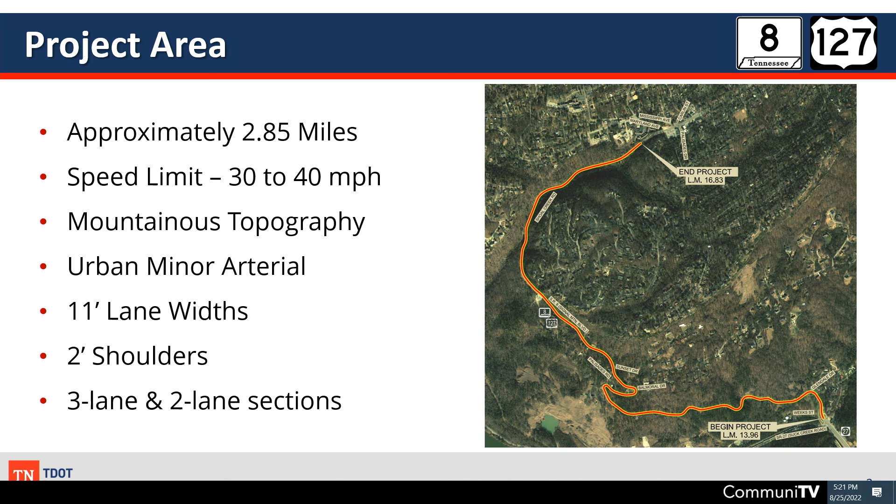The purpose and need of this project establishes what we're trying to accomplish at the end, after we've done our design work and the contractor has constructed the project. The purpose and need for this project is to improve safety and reliability along the roadway, reduce potential roadway failures, and improve the drainage along the route.

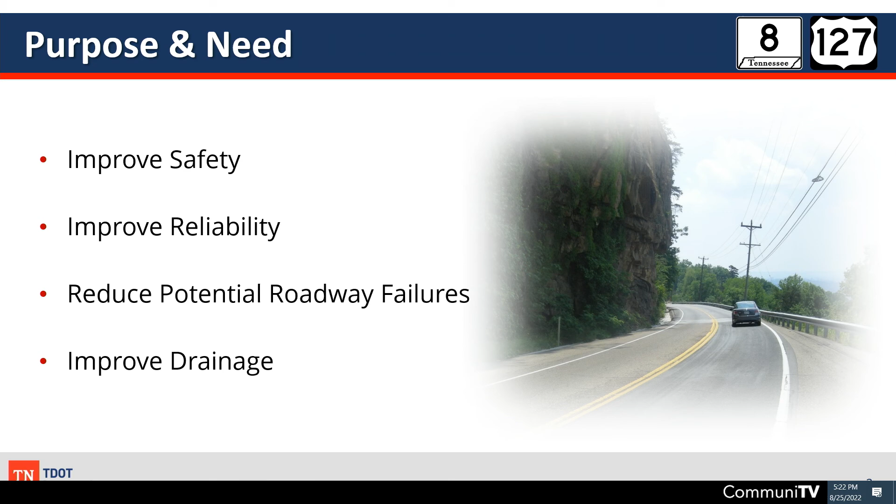Real quickly, just a brief history of where we've been in the last 4 years. In 2018, TDOT updated the technical report to make some minor adjustments, but there was also a rock slide that year, and TDOT completed 2 slope stabilization projects to help increase reliability.

In 2019, a project started for slope repair, which includes building 2 retaining walls along Palisades Road. At that point in 2019, this project started. Also during that year, another slope stabilization project was completed by TDOT, and another one was completed in 2020.

Earlier this year, the slope repair and retaining wall project I mentioned earlier was let to bid, and the contractor is starting work on Palisades Road to construct those 2 retaining walls. This project also reached the right-of-way milestone, where right-of-way plans were completed, allowing TDOT to begin acquiring right-of-way to complete the project.

The next milestone is a forecasted date of 2026 for this project to be let and constructed.

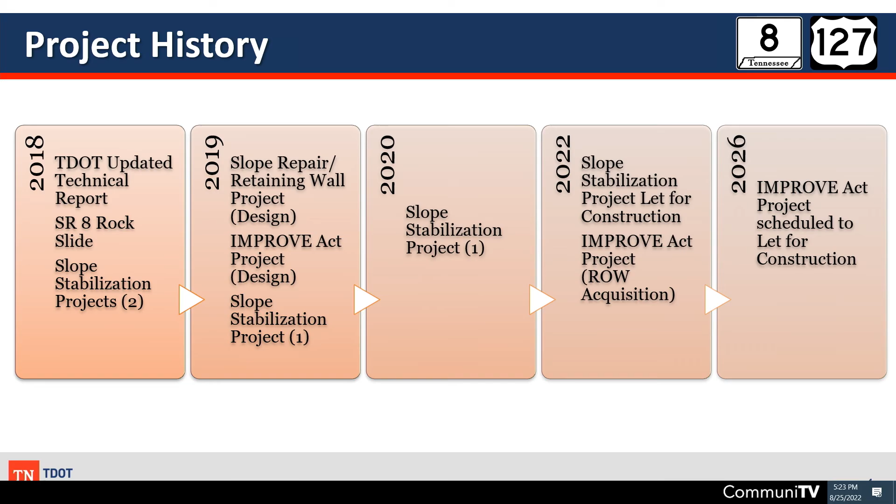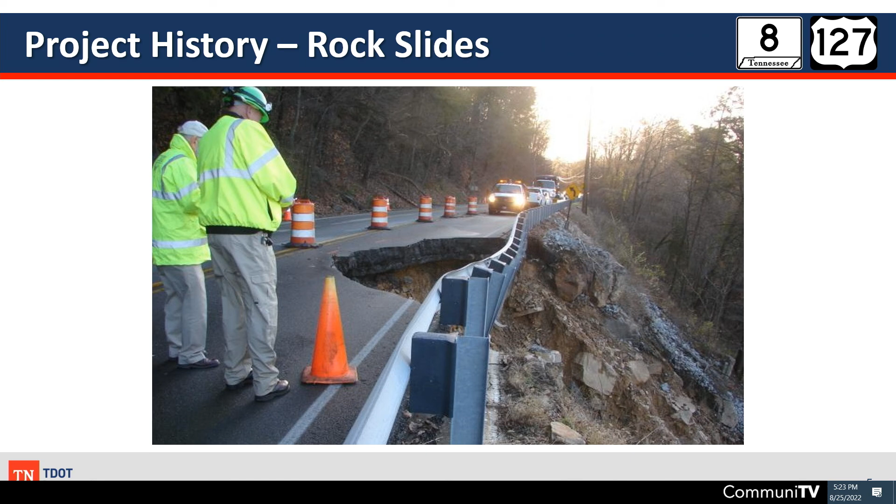As we've seen before, there have been rock slides. In the past 4 years, TDOT has had 4 projects to deal with stability issues. So stability and being able to maintain the roadway is a critical item along the project route.

As we said before, we have 2 current projects: one under construction on Palisades Road, and we also have the Improve Act project, which is at the right-of-way phase.

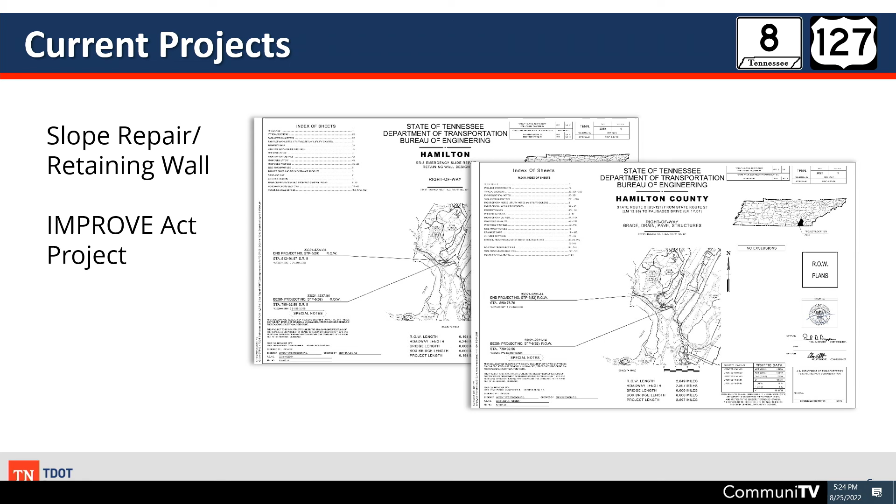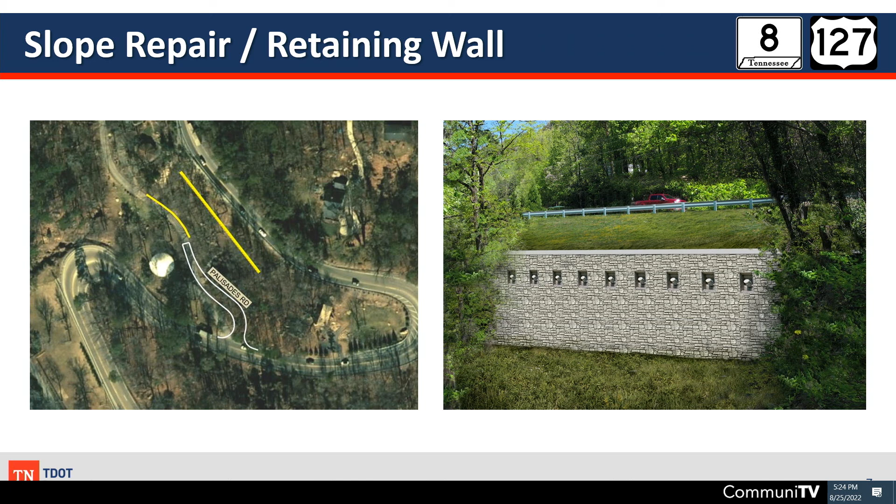Here we have a brief overview of what is going on at Palisades Road. There will be a realignment of Palisades Road to create a more conducive intersection, and the yellow lines are the 2 retaining walls that will be built. In the right photo, we have a rendering of what the wall will potentially look like. That was done during the design phase so we could better understand how it would look and fit in at that location.

As we said before, right-of-way plans have been issued, and the right-of-way meeting will be in the fall of 2022. It will be a separate meeting from this public information meeting we're having tonight. We have a forecasted construction start date of 2026.

As part of this project, safety and reliability improvements are what we're trying to do to increase the safety and reliability of our roadway. This includes 8 retaining walls for slope stability and the implementation of new drainage ditches along the roadway, with multiple proposed drainage improvements. We also include proposed right-of-way at log mile 15.3, which improves sight distance in a couple of locations, and rock mitigation to help eliminate an area with high potential for rock fall.

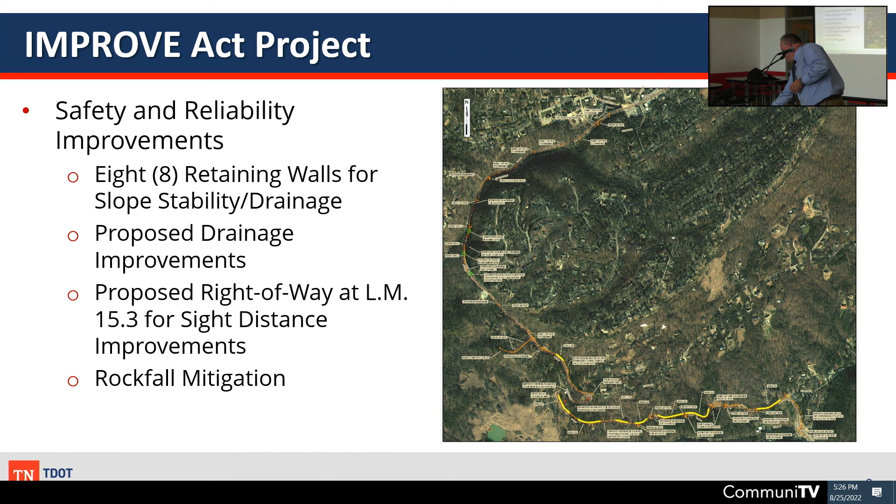Here you can see a closer view of the 8 retaining walls going in along the project. Most of those are there to help put in a new ditch in areas where you don't have a ditch or have a minimal ditch, so we can get a ditch that has capacity and can carry the water better.

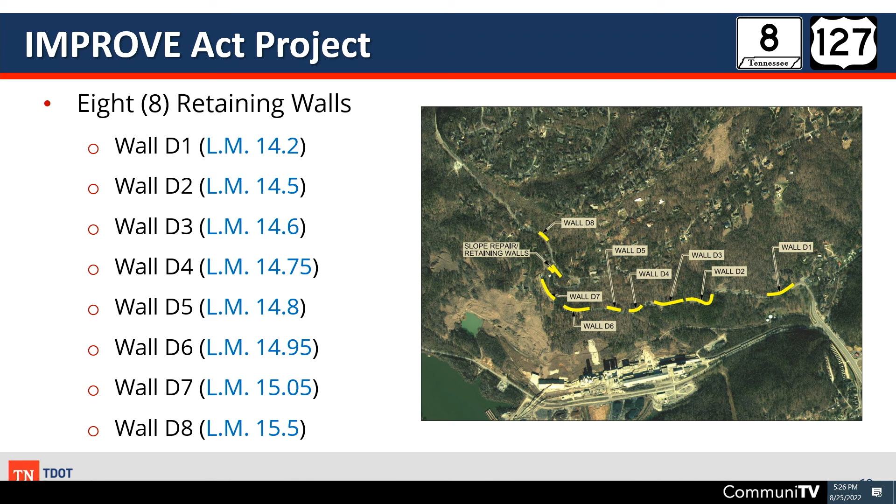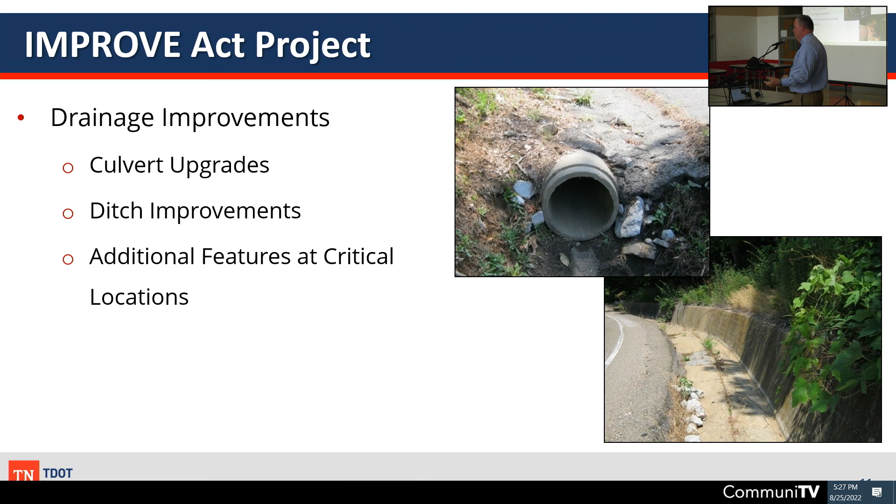As we said before, we also have drainage improvements. Those include culvert upgrades, upsizing culverts that were inadequately sized, that overtopped and caused water to enter the roadway and create dangerous conditions for roadway users. We also have ditch improvements to provide adequate ditch space to hopefully keep the water in the ditch and not have it go on the road. We've also added additional features at critical locations that will hopefully improve how the drainage is moved through the ditch and underneath the road.

As far as safety and reliability improvements, as I mentioned before, we have the acquisition of right-of-way to eliminate an area of sight where we have a sight distance problem, and we've also added guardrail in a critical location that has had a high accident rate.

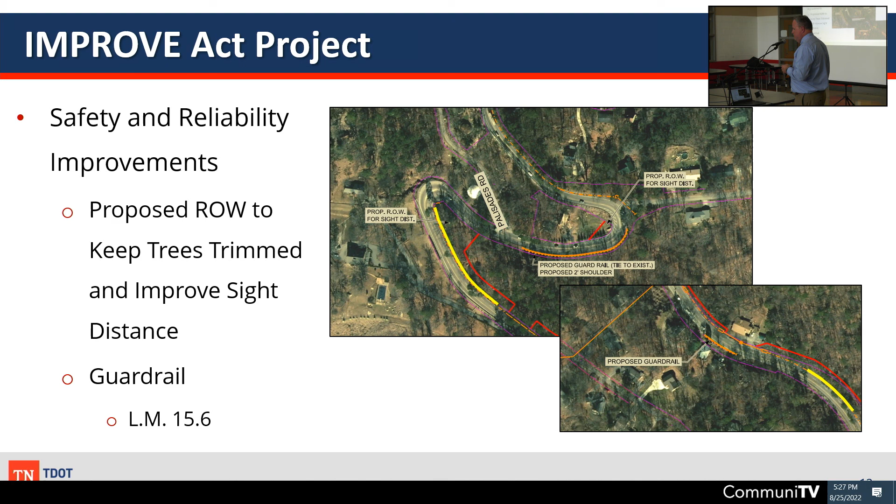Potential areas have been identified through geotechnical evaluation in regards to rockfall. There will be some scaling and trimming, removing the rock that has the high potential to fall. We will also be using slope drapes, which are basically metal nets that will be placed on the slope so that when a rock breaks free, it will be held next to the slope, where the hill and the ground come together. It won't roll out into the roadway, and it will be contained within that rock drape.

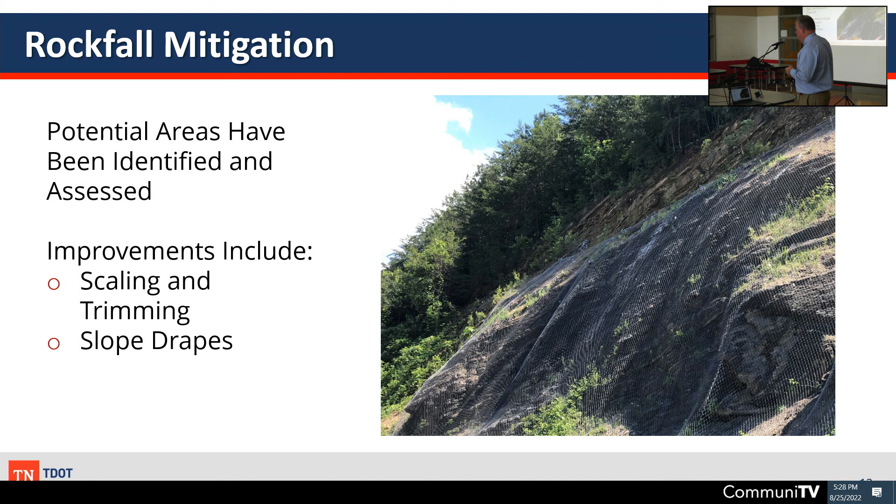TDOT's commitments: TDOT wants to be a good stakeholder with you all. We want to make sure that when construction is occurring, we'll have no closures during the World's Longest Yard Sale, and also have adequate coordination with first responders and local route users during planned closures so that everyone has information. They'll know when things will be closed or when there will be a different traffic pattern occurring.

Our goal is to come up with solutions that minimize the construction duration, allowing work to occur in different locations at the same time, or coming up with traffic control strategies that maximize the space we do have so that work can be done as efficiently as possible.

As Rayanne said before, your comments are important to us. You have three ways to let your voice be heard: tdot.comments@tn.gov, and you can just put that in the subject line so it can get routed to the appropriate people. Your comments can also be submitted by the mail-in comment cards over here at the check-in desk. And you can also see this lady over here, and she will be more than happy to take your comment and get it on the official record.

I think other than that, I am good, and I'll let Rayanne take it back.